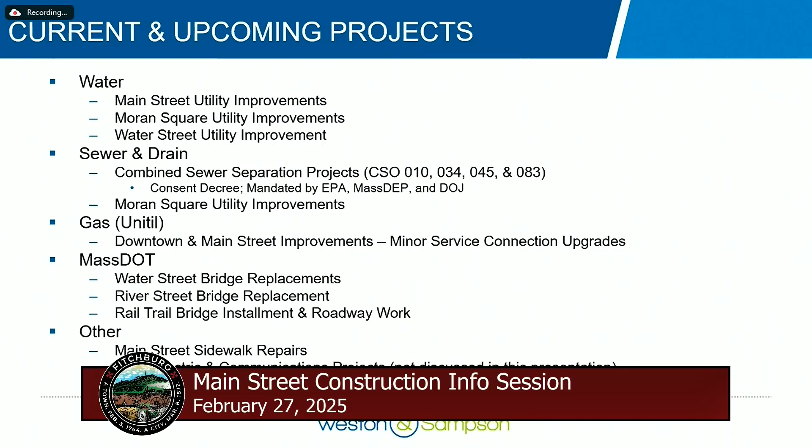Thanks, Liz. Thanks, Mayor. If you want to go to the next slide, Sam. Thanks for attending, everyone, glad to be here, glad to have you here to talk about all these projects. This slide focuses on the list of projects that are going to start this year and occur over the next couple of years in the downtown area.

For the water division, we've got the Main Street Water Main project. On the water side, we're looking at Main Street water main improvements, improvements to the water main in the Moran Square area, and water main improvements in the Water Street area being done by Mass DOT as part of their Water Street Bridge replacement projects. We'll get into that one a little bit later.

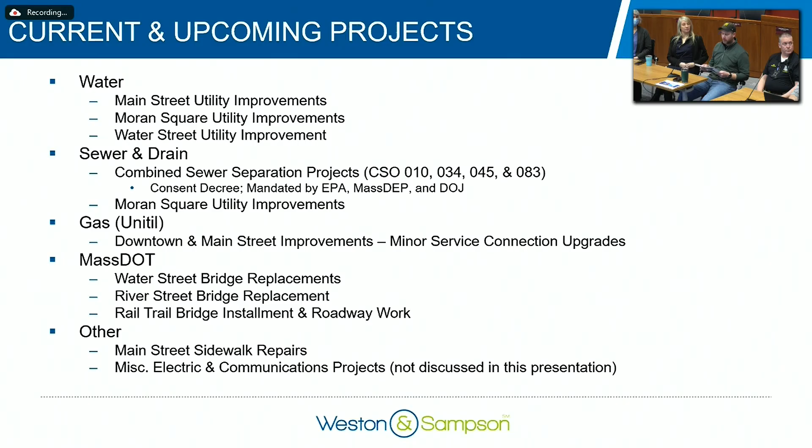We're also looking at a lot of projects on the sewer and drain side. We've got combined sewer separation projects happening throughout the downtown. You might have seen work starting with the CSO 10 project on the northwestern end of Main Street, and we're moving eastward with the CSO 34, 45, and 83 combined sewer separation projects. These are mandated by the consent decree the city is under with the US EPA to separate out all these combined sewers. We're also doing sewer and drain work in the Moran Square area as part of the Moran Square renovation project, which will redo that intersection, traffic signals, lighting, etc.

Unitil's wrapped up some important projects in the downtown area recently. They've abandoned their large gas main that ran down the center of Main Street, and they'll be doing some minor service connection upgrades as part of ongoing work this year and next. They're done with all their big projects in the area, which is good - that gives us room to get in there and do our water and sewer upgrades.

Then we've got Mass DOT working on three really important projects for the city. They're replacing both Water Street bridges, the one over Boulder Drive and the one over the Nashua River. They're also working on the River Street Bridge right now - that project is under construction, and you've probably noticed the detour set up for the westbound travel direction. They're also going to be building the Rail Trail Bridge and completing the rail trail connection to the First and Railroad Street area in the patch behind the old St. Bernard Church. That'll connect that area to the Intermodal Center with a series of bridges over the railroad tracks and the river - a really cool project to continue the rail trail into the city, with the longest pedestrian bridge in Massachusetts soon to come, giving Fitchburg a record to its name.

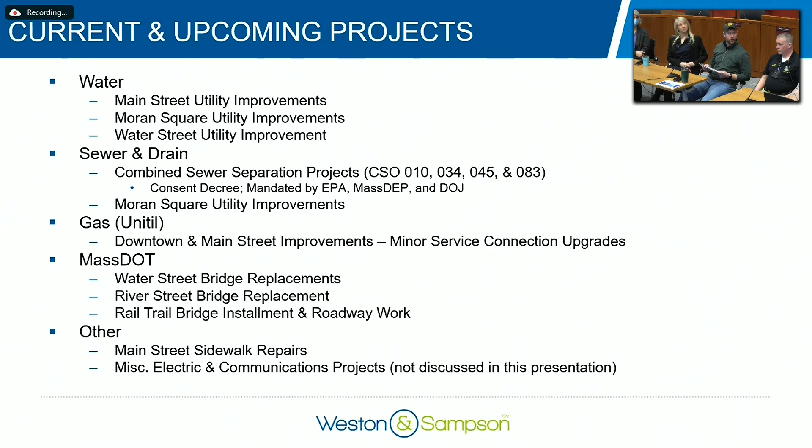As part of all this work, we're doing some pretty invasive work in the Main Street area. At the end of it all, we'll be looking to pave the roadway, do the sidewalks, and do all the surface level improvements that are so badly needed. So that's a high-level summary of what we've got going on - we'll talk about all these in more detail as we get through the presentation.

So up on the screen now, you see a map. This is a zoomed-out map that shows each of these projects that I just mentioned and geographically where they're located.

So the CSO 10 project is that orangey yellow color. That's the project that's just about done construction-wise. There'll be a little bit of paving work that happens this construction season, and then there'll be some ongoing post-construction monitoring in that area.

The green area is what the contractor called GVC is working on right now. GVC is with us here right now. That's another combined sewer separation project, and that encompasses the area essentially from Mechanic Street moving east to Elm Street, Academy Street, that whole general area that you see there in green.

And then upcoming this summer in July, we're going to be going out to bid with the next phase of our combined sewer separation work in the downtown area. That's the CSO 45 and 83 area shown in red on the screen in front of you. So that'll complete the majority of the downtown combined sewer separation work.

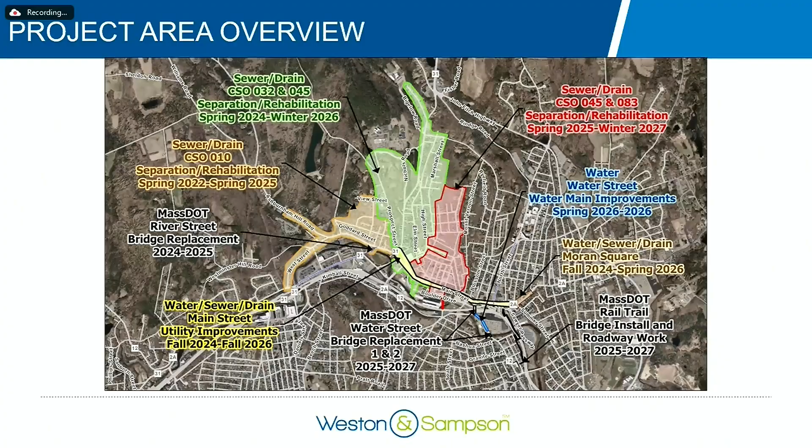So that's the projects in a nutshell. We've also got the Mass DOT bridge replacement projects, which are on Water Street, right up against the project area, and on River Street, again right up against the project area. They just finished the Circle Street Bridge for us, which is huge. That gives us some flexibility with traffic detours.

And one of the big things that's going to work in our favor is the fact that we converted Main Street and Boulder Drive to two-way traffic. That enables us to have a lot of flexibility with rerouting traffic to accomplish these projects. So that was one of the main goals of that project, and we're about to see how well it works with the upcoming construction work.

So next slide, Sam. So with all these projects, we recognize that coordination is key, and Weston and Sampson is going to be working to provide weekly email updates for each of these projects, and those updates will go to city staff and people that sign up to receive that communication.

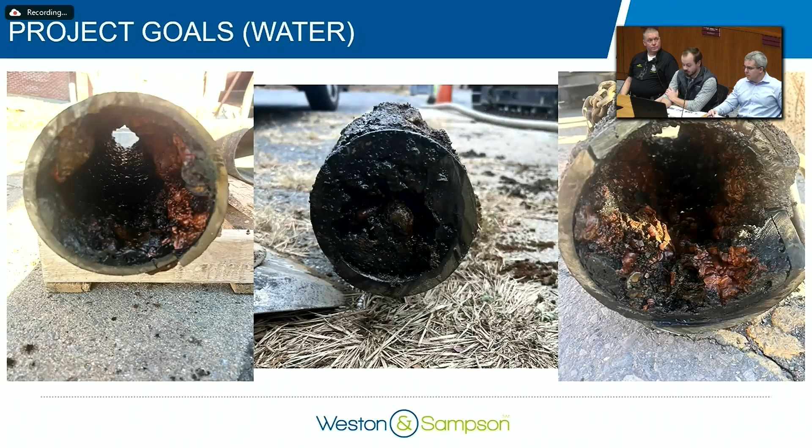So developing into a few more bullets, this will allow us to improve fire flow, especially on that low service system. A lot of those mains are heavily tuberculated, as you saw on the last slide. You're going to see a minor increase to water quality by combating those sections of tuberculation. It increases the city's overall ability to maintain this infrastructure.

You have a very old city. A lot of this section, the utilities have developed over time on kind of a 'where does it fit today' mentality. That makes maintenance really difficult when you have unforeseen issues popping up. So this allows us to relay some of this infrastructure and potentially address some of those deficiencies that have developed over the last few decades.

It addresses aging infrastructure, and it allows us to do it in a planned versus an unplanned manner. This is going to be a disruptive project. We're aware of that, but we can at least put our heads together and figure out how to do it in a telegraphed and organized way versus responding to these failures as they occur, wherever and whenever that may happen. So it allows us to be a lot more planned out, notify people in advance, and try to limit these disruptions as much as practicable.

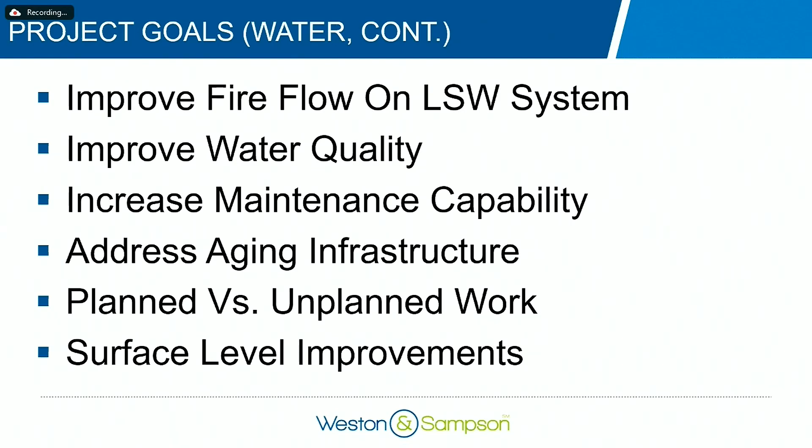And then, as Nick alluded to, it'll also let us perform some surface level improvements and get Main Street paved up, get the sidewalks relayed, make everything look nice at the end of the day when this construction program has wrapped.

This slide shows some elements that are going to be associated with the temporary water system. This is the first thing we're showing because it's the first thing you folks are going to see out your window. This project involves replacement of critical water main infrastructure that's connecting the downtown area.

We can't remove water service. So effectively, we're going to be constructing an entire temporary water system above grade, through these pipes and exterior building connections, to connect your properties to this system, replace the system that's there, and then ultimately transfer you back onto the permanent infrastructure. So without getting into a lot of the details of temporary water construction, just be aware that we have to set the system up.

We have to test these pipes, disinfect them. We need to transfer your services over to these mains, do all of the construction work, test those mains, and then transfer you back. We're going to be touching every single service a minimum of 2 times to perform that work.

So if you're asking, why are we here again? Why are we outside in the same spot we were previously? That's why. It's going to feel like you're seeing some of the same things again. We understand these disruptions affect your livelihoods, your businesses, yourself.

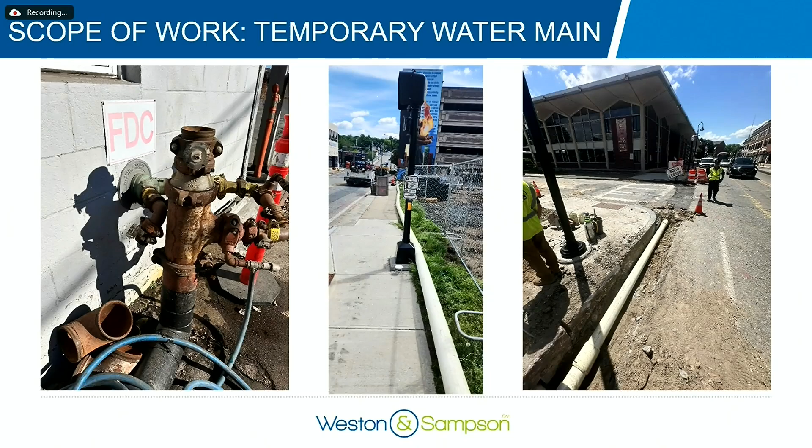We're going to do as much notification as possible, 48 hours minimum, likely way more than that. We have dedicated field staff who are going to be out here. They're going to be looking ahead. They'll be talking with you, saying hey, we think we're coming up on your area in the next week or so. Be prepared for a shut-off notice.

When you do get that, for these transfers, we're going to tell you to be prepared to be without water for probably 4 to 8 hours. The likely outcome is that it's going to be way less than that, but we don't want to overpromise. It's old infrastructure. Things happen that prevent these from being quick.

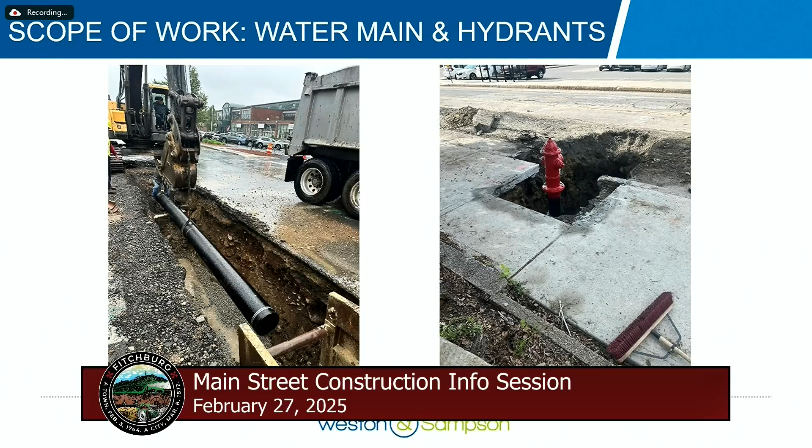So in terms of what you're going to see out your window, the next couple slides just have a couple of those photos. You're going to see excavators with pipe. There's going to be trenches, trench boxes. You see the corner of a 10-wheel dump truck off the photo there as well.

We're going to be resetting some of the hydrants and valves. We'll be cutting into the sidewalk, but the expectation is that the sidewalks will generally always be open, even if the streets and passage on the roadways themselves are impaired.

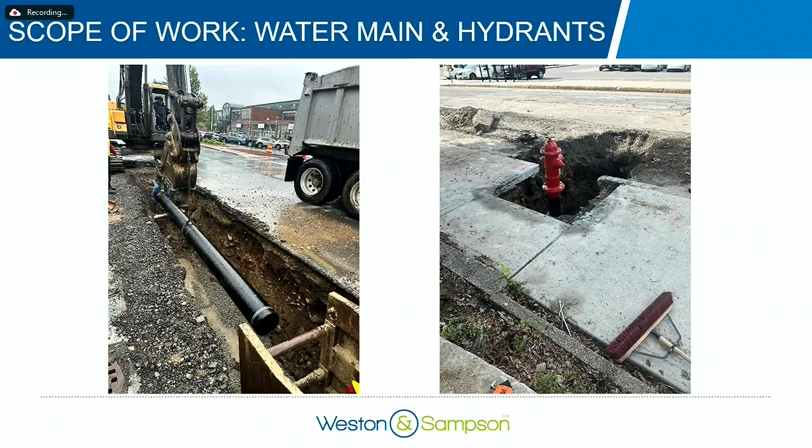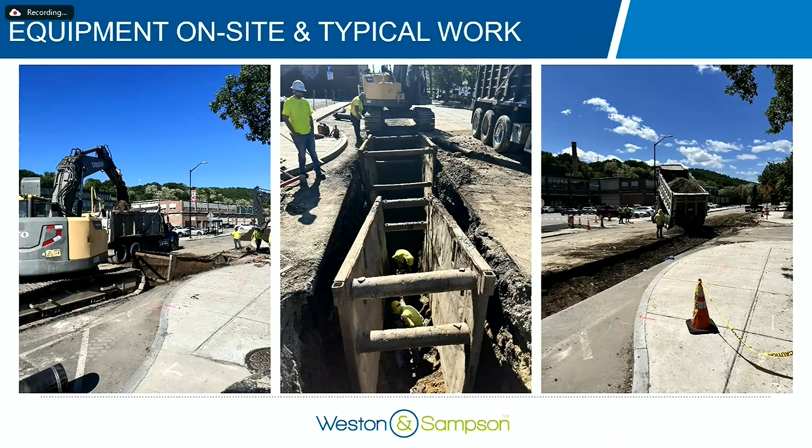Just a few more photos of what you can expect to see for excavation, trench work, and some of the dump trucks that will be in the area moving material off-site so that it's not being stockpiled right in front of your doorways and on the sidewalks.

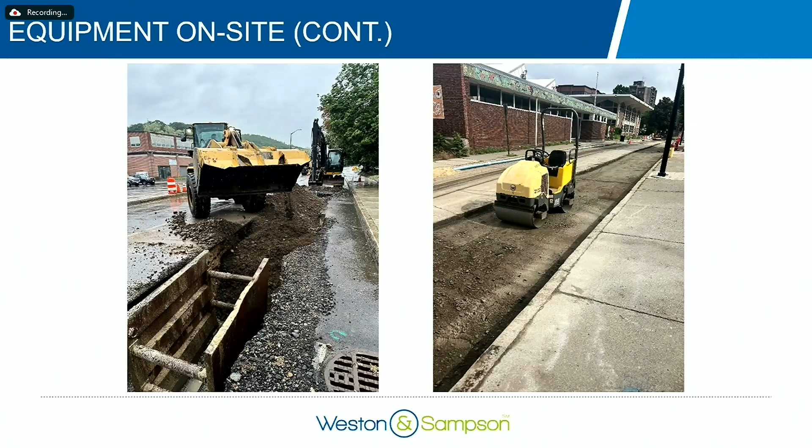Again, just a few more photos of the equipment you're likely to see, including final trench restoration at the end. There will be sections and times when portions of the trench are going to be unpaved, with hard-packed gravel, kind of like you see in this photo. We're going to be working with the contractors to manage dust control, because we understand, especially if there's a dry spell and it's been dry for a few days, that we don't want that dust blowing through the downtown.

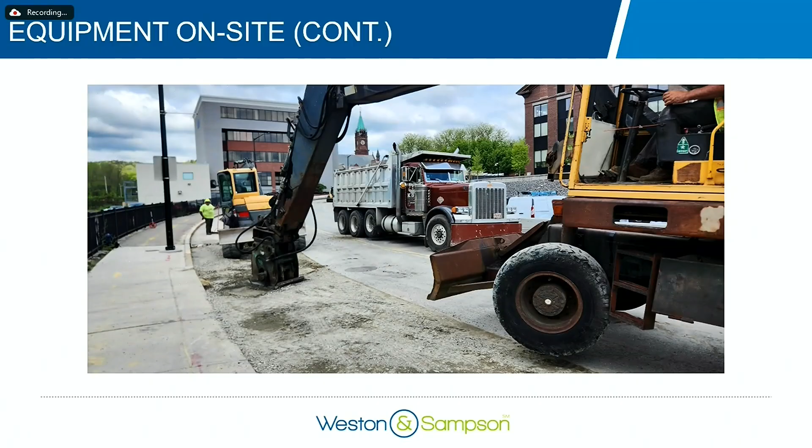So before I pass the baton over to Pat here, I think it's just, we understand this is going to be disruptive. There's a lot of folks in this room on the city side, on our side, and on PD's side, who are going to work really hard to manage that disruption as much as practicable, but do want to thank everybody in advance for your cooperation and patience.

Now I'd like to get into the CSO Combined Sewer Separation projects, a little discussion about these upcoming projects. Again, we wanted to show photos of the condition of the infrastructure as it is. That's a photo of a drain essentially collapsing, which is reducing capacity in the drainage system, likely causing flooding, which will be mitigated as part of these projects.

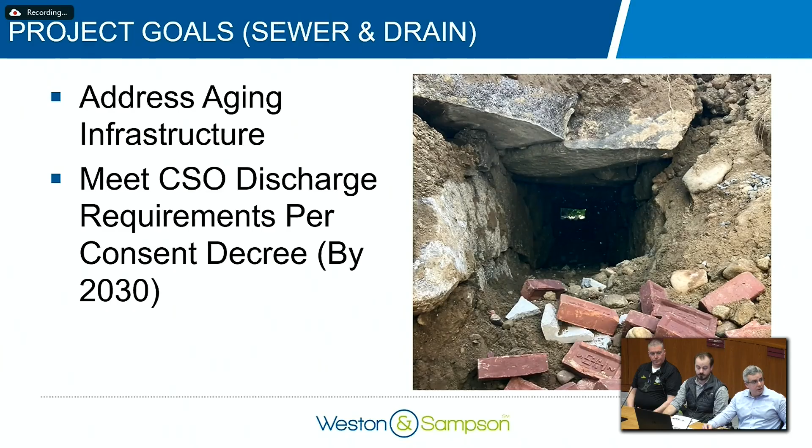The infrastructure is aging, a lot of it over 100 years old. This work is mandated by Mass DEP, the US EPA, and the DOJ to be completed by 2030, so it's on the fast track. We're doing everything we can to meet that goal, and we're anticipating to meet it.

For the ultimate project goals, there will be significantly improved water quality by eliminating the 8 remaining CSOs that discharge wastewater to the Nashua River, unfortunately. It's the way things were done a while ago, and the city is on path to eliminate all of those by 2030.

Which is great progress and is being recognized by Mass DEP and US EPA. I mentioned the mitigation of flooding downtown — all of the drainage within the CSO separation areas will be designed to handle the 2070 theoretical design storm, which increases storage capacity, mitigates flooding, and addresses issues that have been happening in some downtown areas. There will be structural improvements as well.

Every single pipe within the downtown area has been inspected and televised. The manholes have been physically inspected. They will all be repaired and upgraded as necessary to prevent any structural failures moving forward.

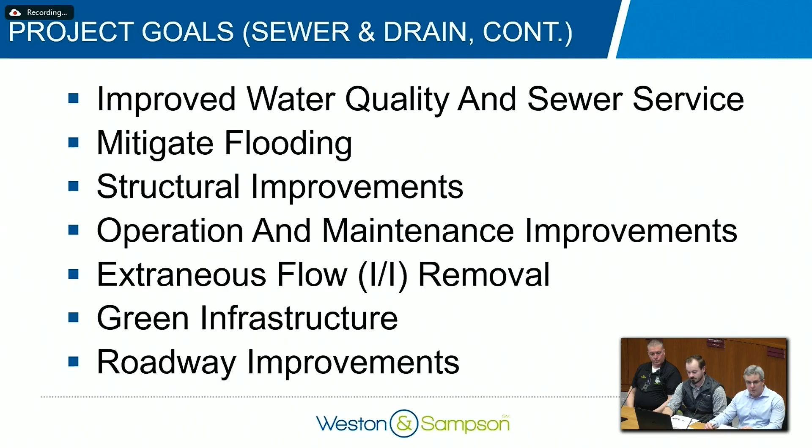Ultimately, it'll be a brand new street, sidewalks, everything will look great. It's just going to take some time and patience to get there, but we're doing everything we possibly can to make sure everybody's concerns are addressed along the way. That'll be the best part.

Yeah, for sure, Mayor, for sure.

Could you explain the I and I so everyone knows what that is? Yeah, I and I, absolutely. My apologies, Mary Jo.

So I and I is inflow and infiltration — extraneous water that gets into the sewer system over years. Infiltration is groundwater that leaks in through cracks in manholes and pipes; it's a slow, steady leak. Inflow is, for instance, in a combined sewer — when sewers used to be designed with overcapacity, the catch basins on the street that connect drainage were designed to flow right into the sewer, and over time the sewers did not have enough capacity to handle the flow, which is why CSO regulators had to be created to provide relief points, which we are now separating.

So at the end of this project, in addition to the I and I removal, there will be one sewer and one drain — no more pipe conveying both water and sewer together.

These are just some photos of the construction, similar to what Sam shared regarding the waterwork — new sewer and drain installation, and some paving work as well.

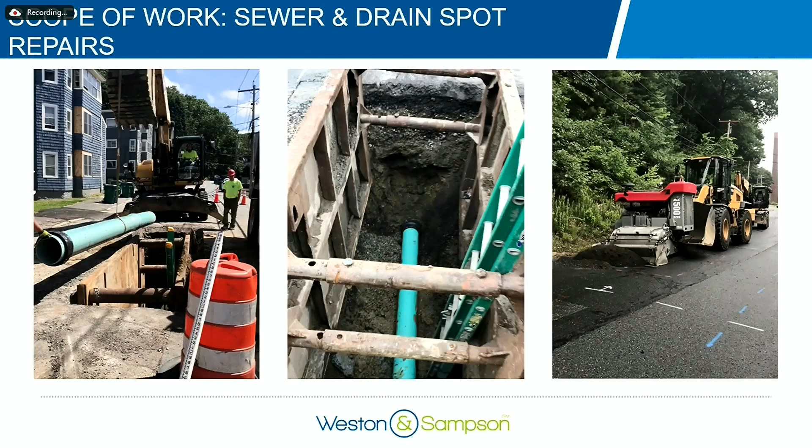Next slide. This is the process called cured-in-place pipelining, or sewer lining. This is used when a pipe is not in an extreme distress situation, such as being partially collapsed — it can be lined without having to dig up the road, and it's much cheaper and less invasive, as you can see.

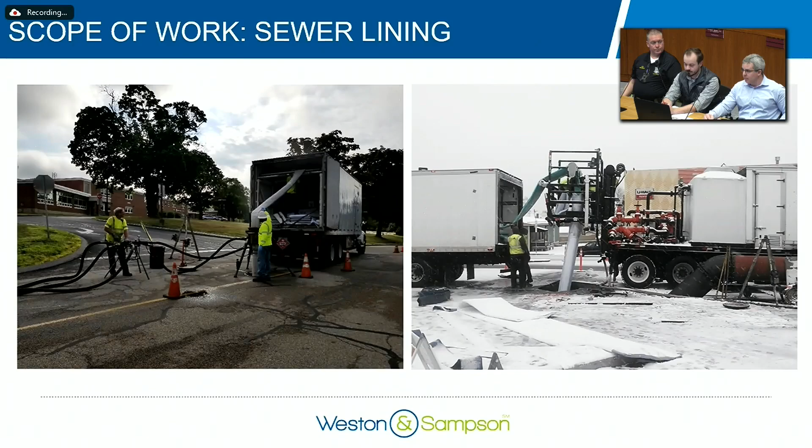The process typically takes about 4 to 8 hours. The pipe is lined — it essentially goes in like an inverted sock, and then it's heated with steam and cured. Then a mechanical robot goes in and opens up all the service connections to people's homes, so essentially it's a brand new pipe without having to dig a hole.

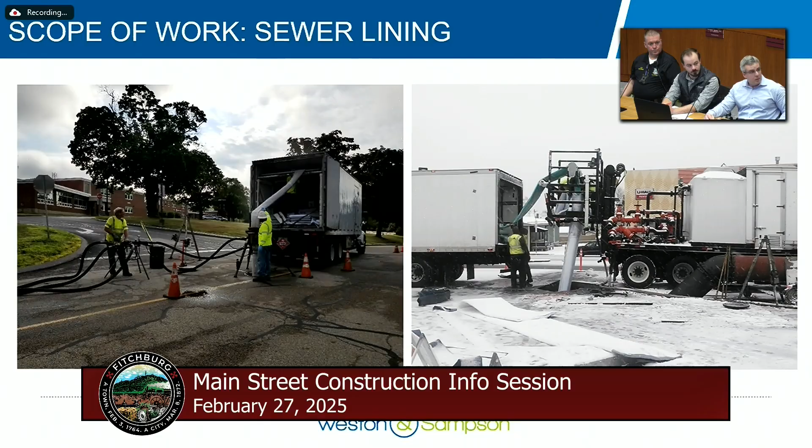Again, as these situations arise, much notice will be provided to everyone, so it'll be out on social media, it'll be everywhere, so that everyone knows exactly what's going on regarding major detours. But as you can see in these photos, this is major construction, going back to what Sergeant Boudreau talked about as well.

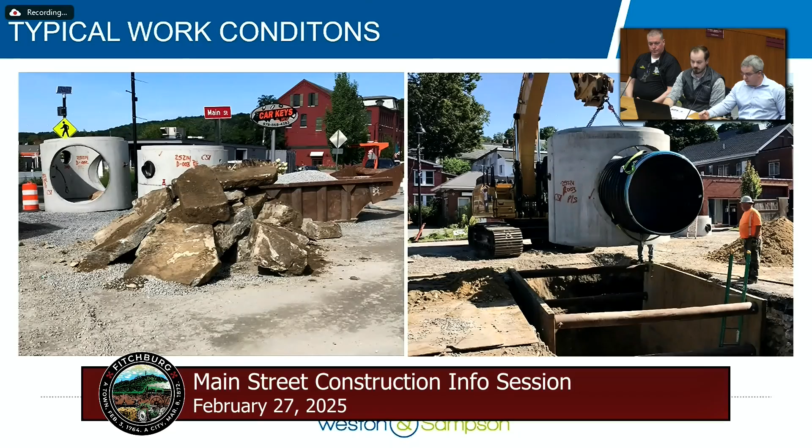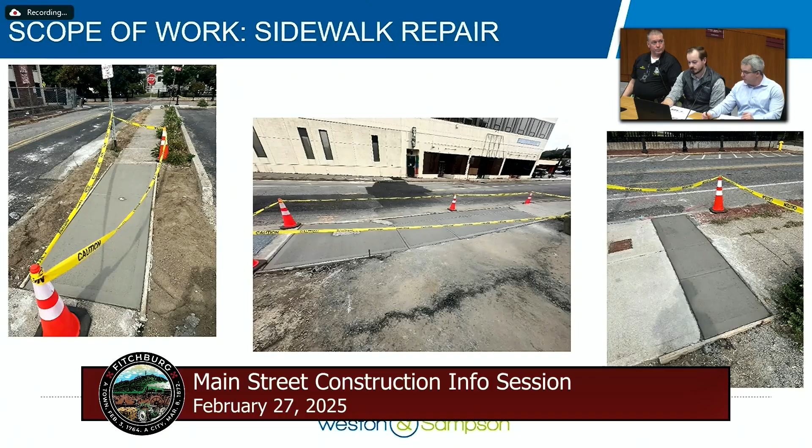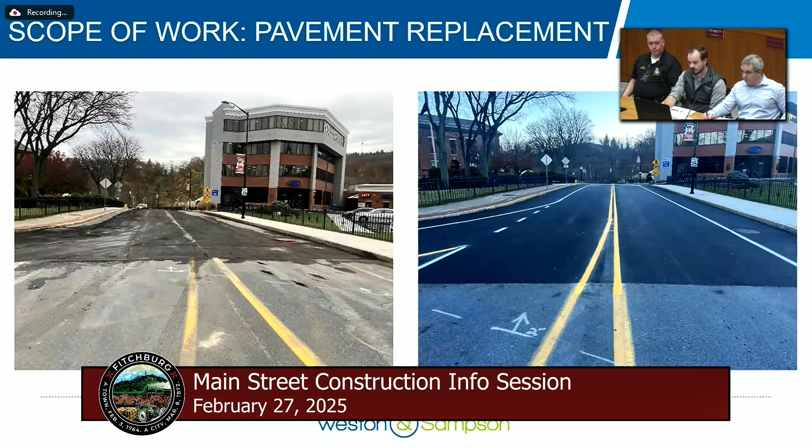This is what you can expect to see in the downtown area following the completion of the projects by 2030.

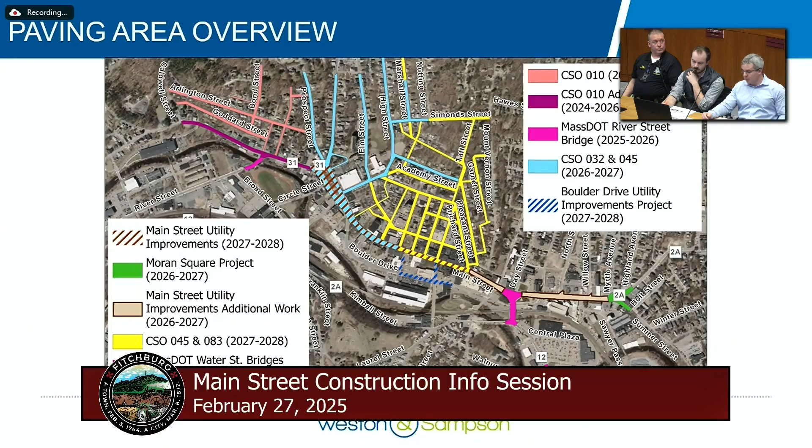We also wanted to share a general overall map with a general timeline of when each area will be paved. It's not all going to be paved at once. It's going to be paved as the construction phases are completed. It pretty much speaks for itself as far as the timeline, but it goes in order with the project. So as the separation projects are completed, following those projects, the roads will be paved, sidewalk issues will be addressed, new sidewalks will be installed where necessary.

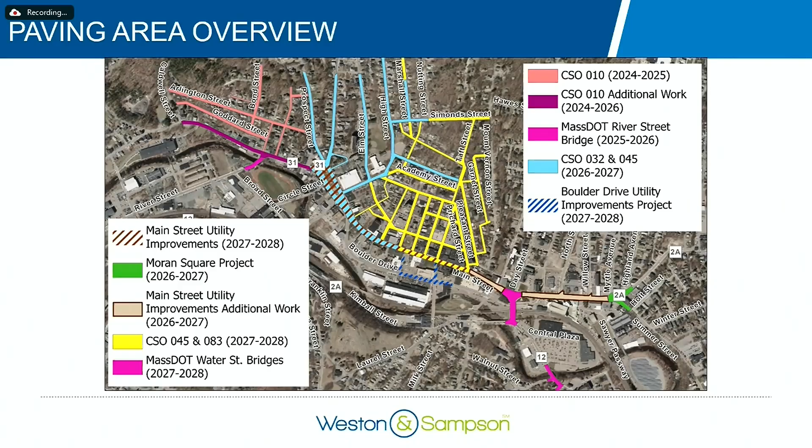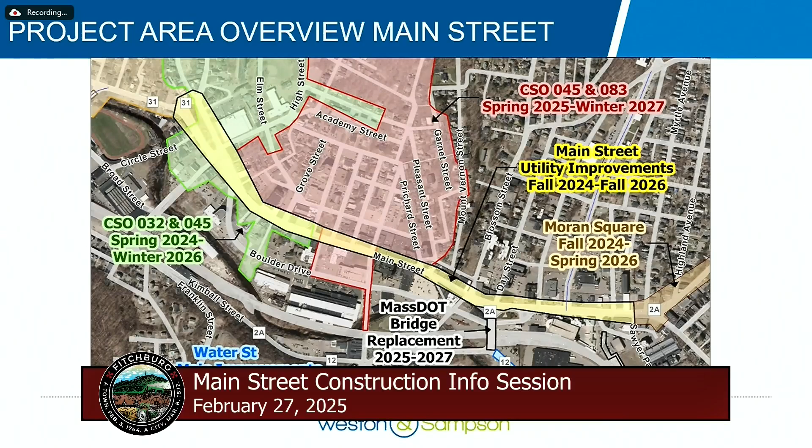What's the color? It's the green area shown on the map up on the screen. That one's been bid out. It's being fully funded through the SRF State Revolving Fund program and supplemented through city wastewater division funds. So that's the revenue generated from ratepayers.

So that project's funded, in addition to the CSO 10 project, which is just about done with construction. J. Polito and Sons did that project too. They're just about wrapped up. There's a little bit of paving left. That one's fully funded. The project that's shown in the red right there...

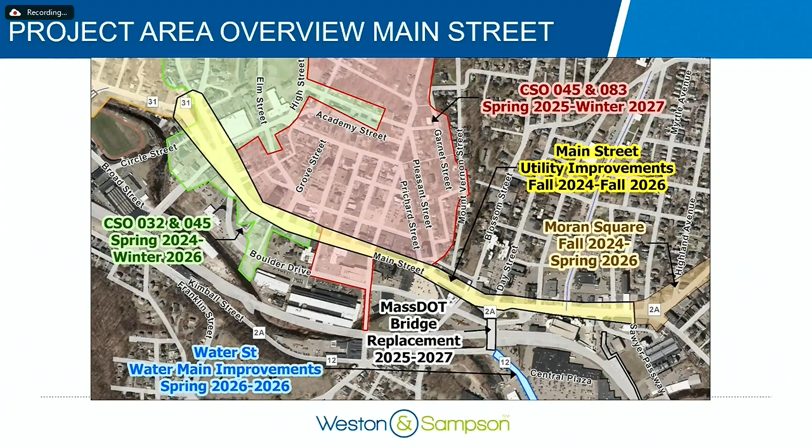it's funded through the SRF program, but we still haven't gone out to bid with that contract yet. So we don't know exactly what the final numbers are going to come in at. We're not entirely sure what percentage is going to be financed through SRF versus city funds. But the intention is to have that funding lined up by the time we're ready to bid that out in July.

So we don't anticipate any funding needed to accomplish any of these projects. We've got plans in the works for everything that we're talking about here. So we don't anticipate any sort of delays or issues with being able to pave, do sidewalks, et cetera.

And then to add, MassDOT is responsible for replacing the Water Street and Laurel Street Bridge. They're doing the River Street Bridge. They're also doing the Twin City Rail Trail Bridge that we discussed. And then after the big Water Street, Laurel Street Bridge, the one that goes over the train tracks and the river, once that's completed, then they'll be doing the upper Water Street Bridge that's up by First Street. They'll be completing that as well.

And then when it comes to the Moran Square, we're doing water and sewer work there. And then we also concurrently have a design that's funded through the Housing Works grant, and we're going to be applying for a MassWorks grant to do further work in that. That's also tied to the MVP program for climate resiliency, for flooding prevention or remediation. That'll be coming when we apply for that. But I'm confident we'll get that funding.

Yeah, and that Moran Square work is going to focus on a lot more than just paving and sidewalk restoration. That's complete intersection redesign, upgraded signals, upgraded lighting. So the intention is to fund that with the MassWorks grant, like the mayor said. That'll probably be one of the later components of the work, just because it's important to take care of all the underground utility stuff first. That way we're not digging things up twice.